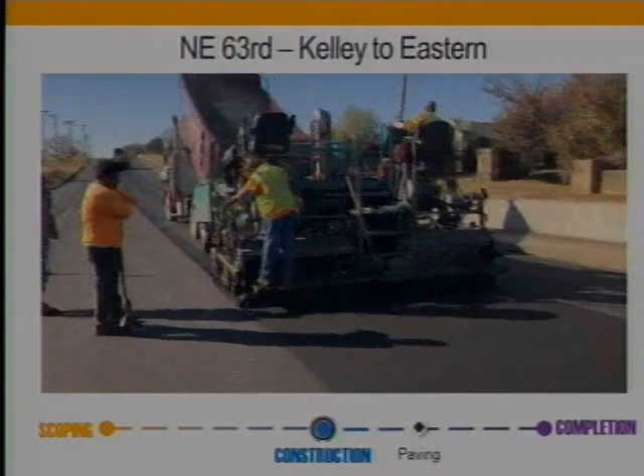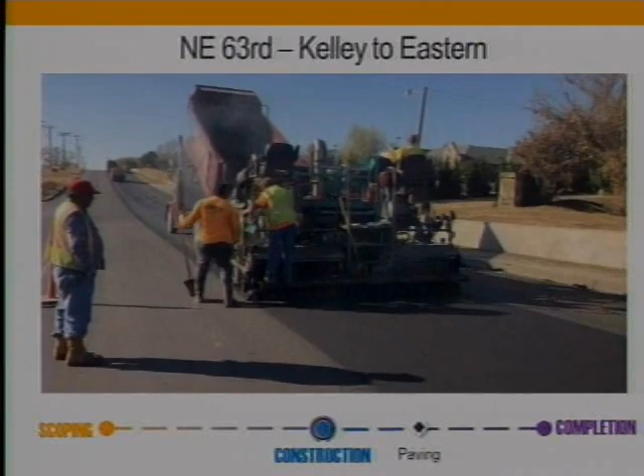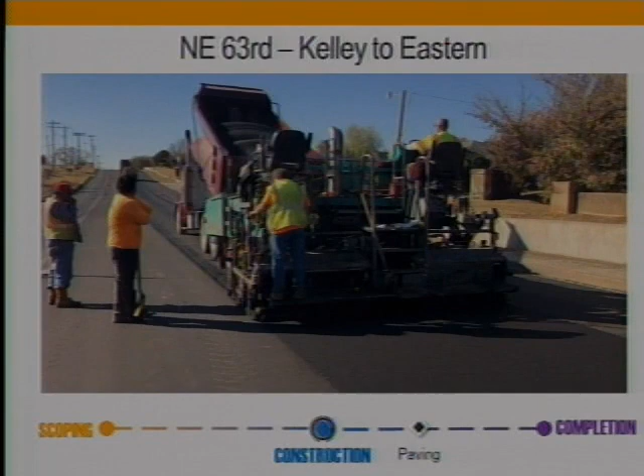So as you can see, the asphalt truck backs into the paver and starts dumping, and that paver is pushing the truck along as the asphalt dumps. Everybody's got a purpose there, watching everything. There are different augers on both sides making sure the surface is matching up, nothing's off.

If need be, they'll make small adjustments. It's kind of a loud process, but everybody's got a role. As we move along, we'll try to bring more videos to show y'all and give an idea of the work going on.

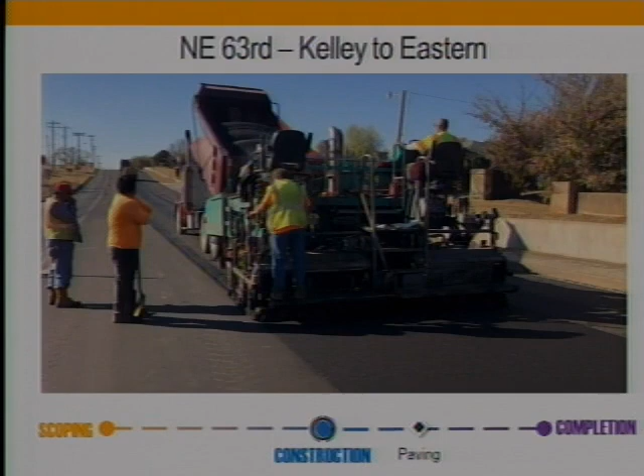That particular project, they've finished all the paving and are waiting for it to be striped. This photo, I just really liked it. I thought, man, that looks like fall, with all the pretty leaves, so I thought you can't not put that in the slides today.

So Northwest 36th, Pennsylvania to Western, all of the asphalt's done and it's been striped. They're still doing some concrete repairs at the intersection there at Western, so they've got a few more things to get done, and then they'll do the striping on the concrete and get that project wrapped up.

So Rockwell to Wilshire, it's virtually complete. You can see all the striping done, and so the city's signing off. We're just verifying all the punch list items are complete, and then we'll move to final acceptance of that project.

Northeast 63rd, Santa Fe to Kelley. This is in connection with the other Northeast 63rd project. This one's a little further along - it has all the paving complete and all the striping, so our inspectors just got with the contractor. They're doing some punch list items, and then they'll call for a final, and hopefully we'll get that one wrapped up pretty quick too.

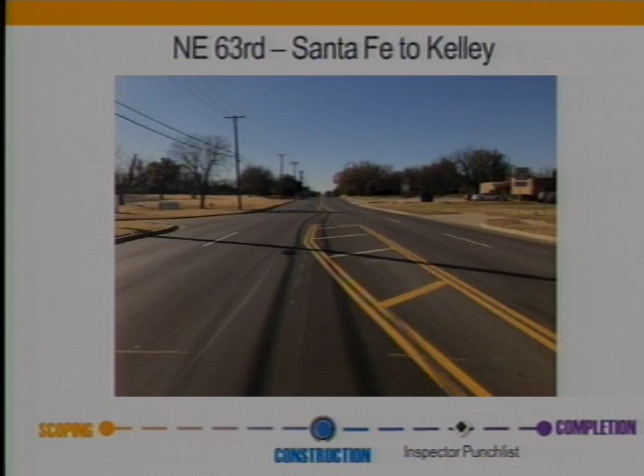So having covered all that, we come to our next item, and this will be an action item. Last week, Eric showed you the new prioritization method with the new program. It has everything computerized, and it's going to run all the streets in the city and push the ones that need the most attention to the top.

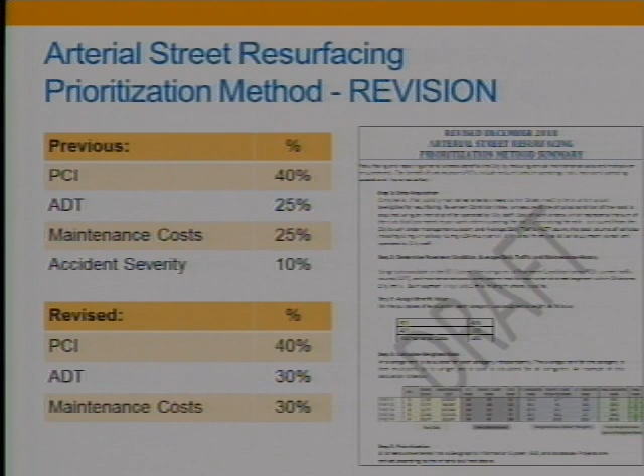It's a little bit different. We use the same data on both of them - we're using the pavement condition index, the average daily traffic, and maintenance costs.

One of the items on the residential side that we've always wanted to include, we put into the program - it can get the number of addresses. So any housing in that residential area, we can get the density of that area, and we feel like that was pretty good data to add into the program.

So we still use maintenance cost per lane mile, so that's in there too. I think that's always crucial to include. The more visits we make to those projects, the more money we start spending on them, and we know we need to get out there and make more permanent repairs rather than just a pothole here and there. So that was a data point we added.

So at this point, I'll ask if you have any questions on that. If not, we would ask that we approve the new prioritization methods for the arterial and residential resurfacing.

I have a question - it's an observation and a question. On one of the streets we previewed last time as finished, which was 50th Street between Penn and May, during the last large rain I was on that and ran into a lot of water. In subsequent trips I've noticed I didn't see any drainage in that entire length of highway, and I was just going to ask if that was because there wasn't infrastructure or drainage available to do, or why, what's causing this?

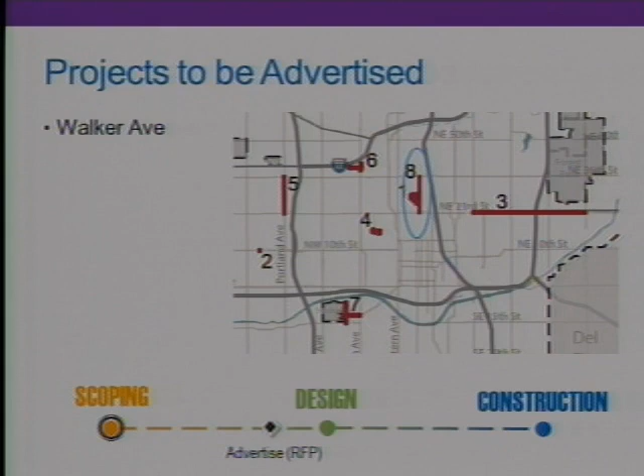It'll be advertised, it'll be out for a few weeks, waiting for consultants to submit letters of interest or proposals, and then it'll continue through the selection process and design. So that's Walker. A few other projects that are further ahead: Paseo, Portland, Northwest 39th, and Stockyards.

Those have been advertised, letters of interest have been submitted to the city. We now have a couple of committee members that are going to participate in the selection process along with some city staff members. So those proposals or letters of interest will be sent out, I think, in the next few days.

So you, Mr. Dixon, will actually be one of those, and Ms. Hernandez will be the second one.

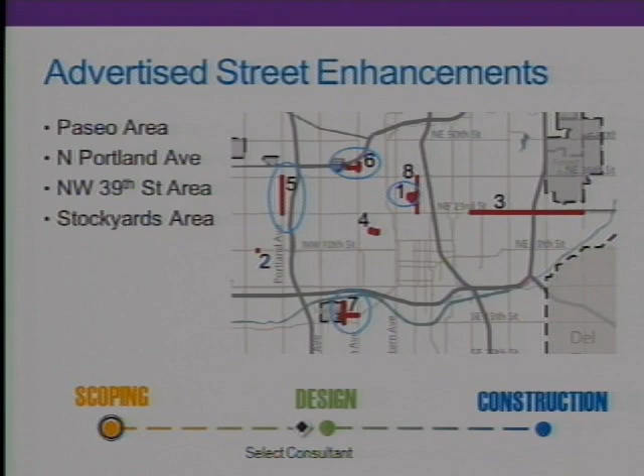So that's that group. Once those letters of interest have been received, you'll have the opportunity to help us whittle those down to 8 consultants that will then be interviewed, and then we'll make a selection from there. This group of consultants that have submitted letters of interest will be taking all of those through the same process.

In other words, we'll be selecting consultants for all of these at the same time from that same pool of applicants. So that will be happening soon.

And then finally, the projects that Public Works has on-call consultants for, these are typically consultants assigned to projects that are not quite as complicated. That would be 10th and Vermont, which is an intersection, Northeast 23rd Street, and the Plaza area.

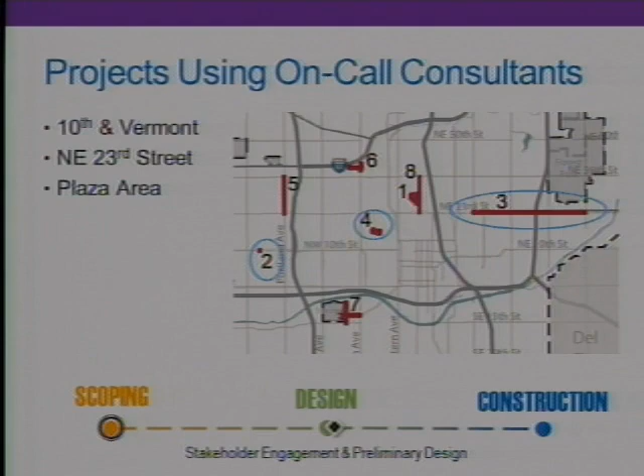Those are not as extensive. They're more kind of fixing some issues that have been identified. They're not as comprehensive as the other projects, so these will be a little simpler.

There are a couple of consultants that will be used for those that we have on contract already. One is CEC, and one will be Atkins. Since they don't have to go through the advertisement process, it's a little bit faster, and we'll be able to get on that a little bit quicker.

And with that, I think that's everything I have on the street enhancements, unless there are any questions. I have a question.

So do we know which consultants are being identified for the 3 that are using on-call? Yeah, CEC will be given 10th and Vermont, and then Atkins will be given the other 2, Northeast 23rd and Plaza.

Any other questions? Okay, I'll hand it back over to Brock. He's going to take us through some of the other projects, updates.

I'll move through the sidewalk projects. We've approved the 5 different areas, the PPAs, the pedestrian priority areas. We approved the schools, the parks, the transit, and the downtown sidewalks.

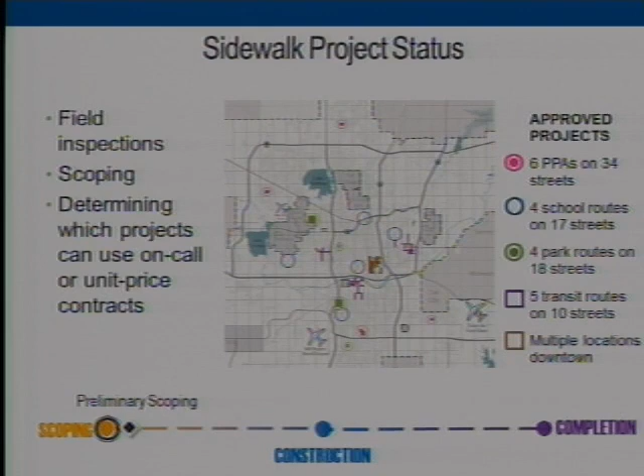We're just in that preliminary scoping to verify the ones we can do in-house and use the unit price contracts and the on-call stuff, and then identify the ones that may need to go to an outside consultant to do a little more research on issues like that.

Bicycle facilities are really in the same category. We're in our preliminary scope, reviewing those projects. A lot of these we feel like we can do in-house, and the ones that we feel need to go to an outside consultant, we'll advertise those like we have with the street enhancements.

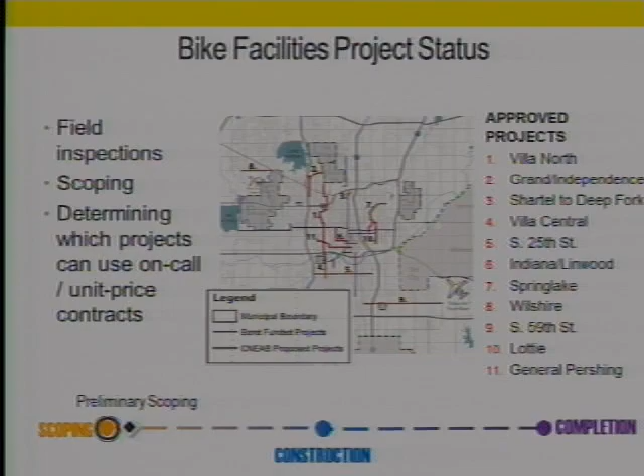Now the trails, of course, obviously the Bert Cooper Trail was one that y'all wanted to get as an early start project, and it's moving along really well. A lot of our crack seal and our transverse crack repairs, so all the initial repair process of the structure and everything that's there, we've completed that in all the phases.

So what we've done is jumped back to phase 1, and all the paving is complete on phase 1, and we're just moving forward. Each day that we get the right temperature and conditions to do some paving, we move forward with that paving. Hopefully we'll keep marching through and grab every good day we get and try to complete that process as quickly as possible.

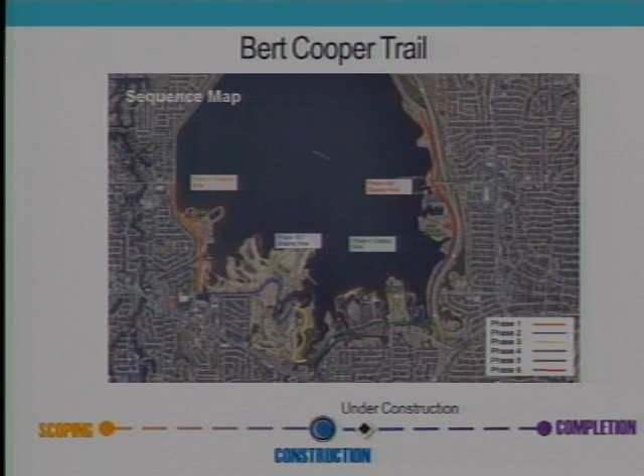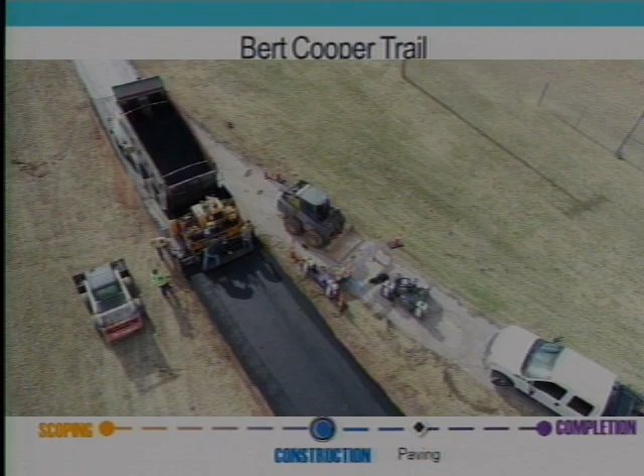We had a really good drone photo of this project, and we'll bring this back to you. We had some issues with it working this morning, but it's really neat. It starts there on that first phase, and as it pans out you can see the lake and everything, and you can watch these guys scramble around and do the construction. There's a little more movement on this one than the other paving video, but the drone was really neat. We'll try to do more of that so you get to see it, and I think that's a cool thing to display. But that project's moving forward and things are going good.

The rest of the trails, same thing, we're in the preliminary scoping and looking at those. A lot of the existing trails that have already been approved, we're evaluating and looking at that stuff, and hopefully we can get more of those moving quicker so we can show more videos of more trails being repaired.

Got a question on the Bert Cooper trails. What percent would you say is completed of that project? As far as monetarily, obviously all the huge cost is in the asphalt, so where it might only show we're 60% complete with the monetary value, in real essence we're probably 70% complete.

I think doing all the crack repair, that's some of the slower work that takes a lot more handwork and things. So we've moved through that, working with the Parks Department and trying to keep all the planning going on. They have a lot of events out there and continue to have events, so we work with them and make sure we get through the phases and don't disrupt any more of those than we have to.

But I'd say we're 70% done. I think this last 30%, while it is winter, will move pretty quick, and hopefully we'll finish by January. I think last week I'd brought that estimate of times when complete, and I still hope that we get that done by January.